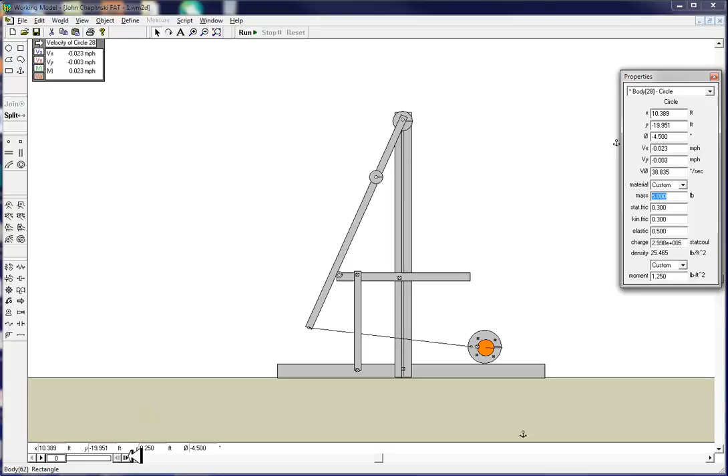So let me step through this thing a little bit. Oh, by the way, I have a 5 pound pumpkin. Okay, it's a little big, but I just did that to be conservative. Okay, so let me step through this thing. First part of it is pretty much self-explanatory.

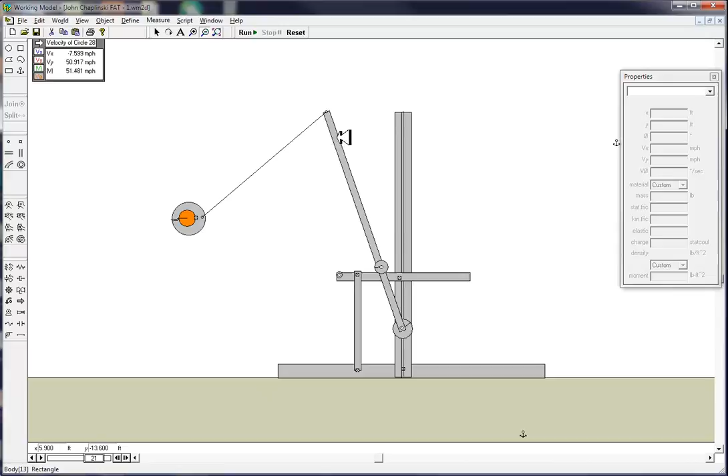Now, when this big roller hits the crossbar there, it starts to come back the other direction, and it finally whips around. I'm going to reduce this down a little bit so that we can see what's actually happening. So as it goes around, it finally gets up to 56 miles an hour, and that's really cooking pretty good.

Now I wanted to show you what that actually means. I have a pumpkin here, and it's going at 56 miles an hour. I have its direction going at 0.6 radians, and that translates to about 34 degrees. So maybe it's a little low. I could make it a bit higher if I wanted to.

And I made the mass actually 6 pounds. No, let's change that back to 5 pounds. It won't let me. Hold on just a second. Okay, I finally got that changed. It was just a limit that I had on that particular variable.

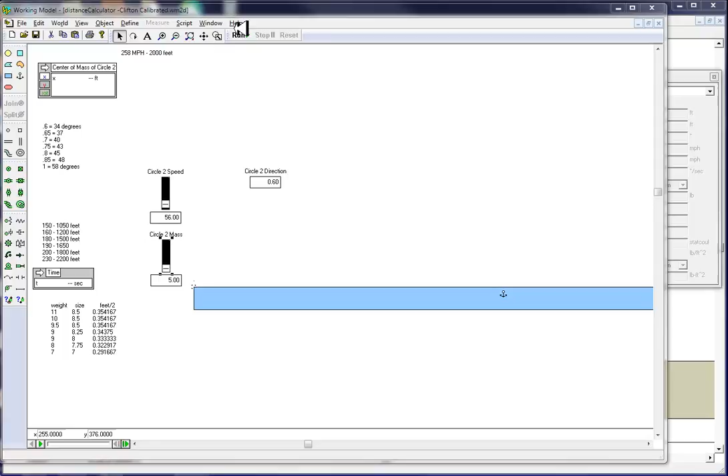And if I let this run, I can get some idea of where the thing's going to actually land, and that's over here. So you should be getting a little bit over 300 feet out of what you've got there. I feel fairly confident in that number, if the rest of it is the same.

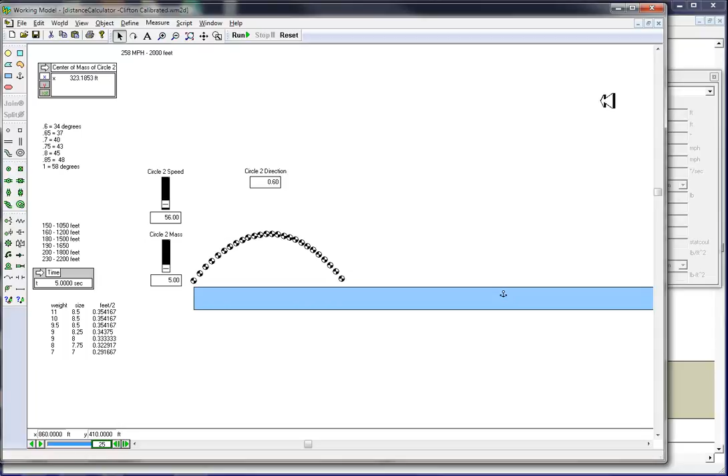By the way, let's go back to the other one. There is one change I had to make. If you'll notice, the actual weight of the throwing arm, I beefed that up to about 20 pounds. And the reason for that is because the throwing arm was actually going backwards as a result of the pumpkin being thrown. Let's go through that again.

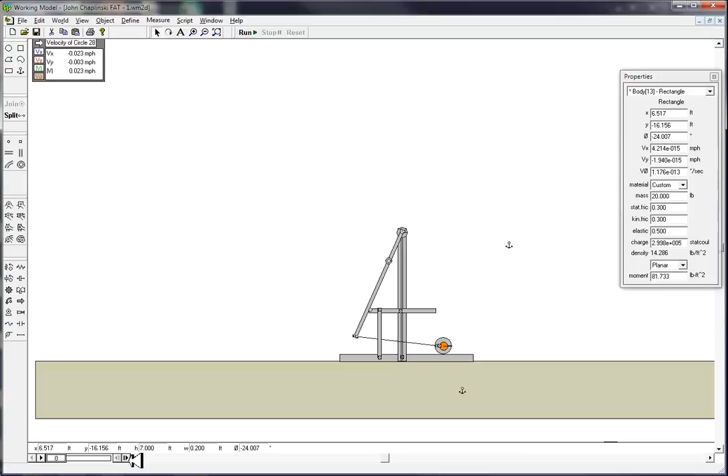Okay, you'll notice that's where it actually released. If for some reason it didn't release there, you'll notice how it actually went backwards. It was pulled backwards by the actual centrifugal force. So that's why I added a little bit of weight to your throwing arm.